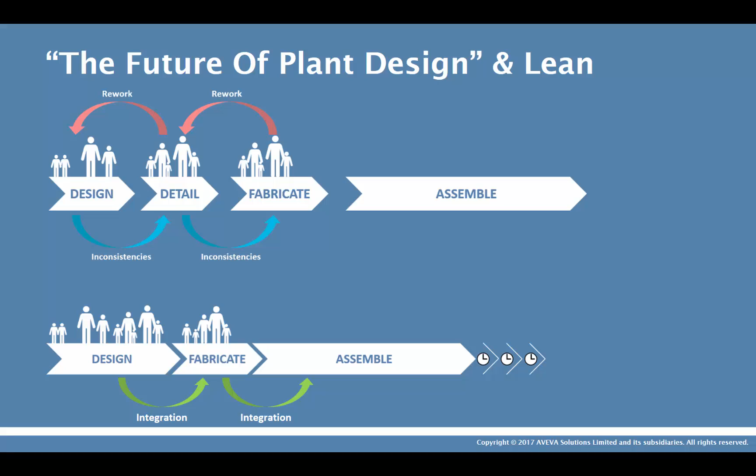I guess what I'm talking about is something slightly different. It's trying to make sure that you keep on track, you keep the information integrated all the way throughout your design process, right from the beginning all the way through to the end of fabrication. This is important in the marine industry because there's so many bits to deal with.

It wasn't always like this. Back in the bad old days of black and white photographs, we used to make everything bespoke. Every part was different, and it was a very time-consuming process to build a ship.

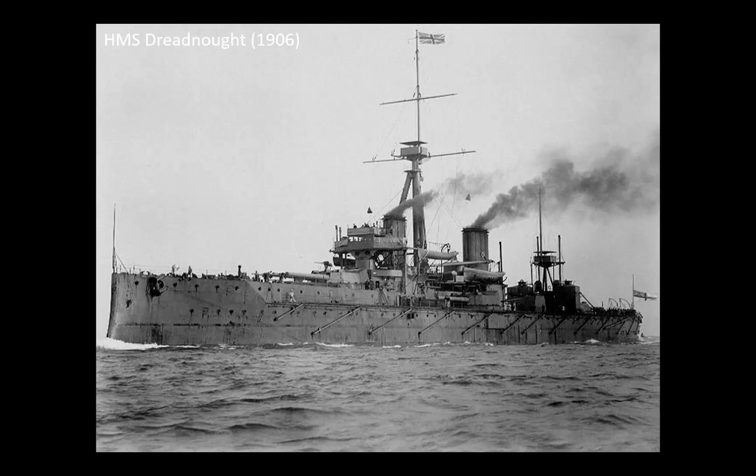But with the introduction, or the oncoming of the Industrial Revolution, the arms race that occurred before the First World War, we started to think about how we could build more technically advanced ships quicker.

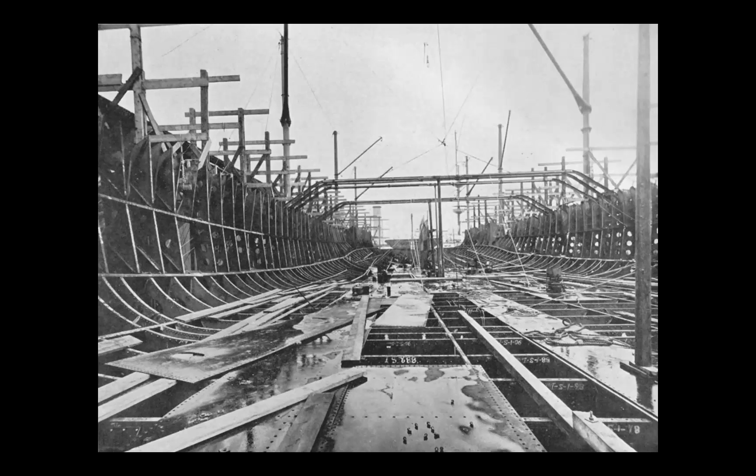HMS Dreadnought, built in 1906, was one of the first Royal Navy ships to really use this approach. This image was taken 2 days after the keel was laid, and you can see that a significant amount of construction has happened in that time. It was achieved through far more standardization than had ever been achieved before.

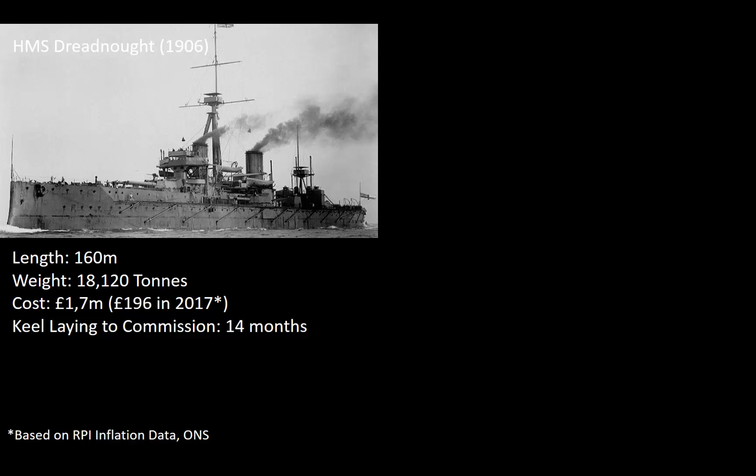This approach is even used today, and it's interesting to make some comparisons. Back in 1906, HMS Dreadnought was a ship 160 metres long, under 20,000 tonnes, and cost almost 200 million in today's prices. It took 14 months to complete.

Compare that with a modern Royal Navy ship: we have a smaller, lighter ship costing 5 times more and being delivered 6 times longer. Perhaps this isn't a fair comparison, because within reason this type of project isn't really taking advantage of the lean approach.

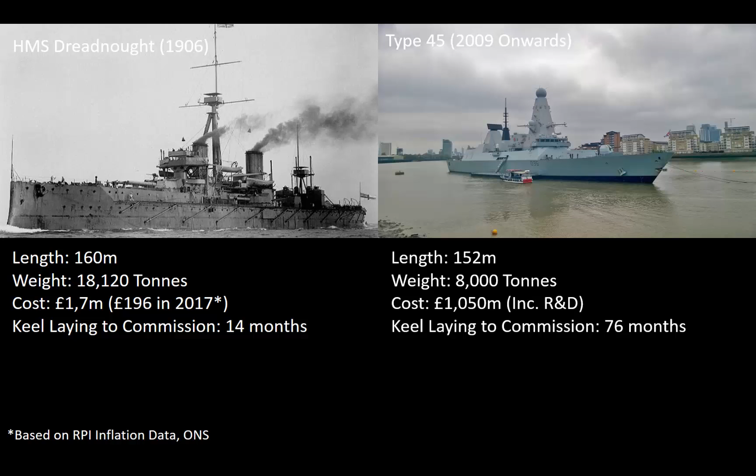But if we look at the commercial sector, we're having to really adopt this because of the competition in the market. With Queen Mary 2, we see a ship that's twice the length, 4 times the weight, costing only twice as much, and still being constructed in about the same amount of time.

To achieve this with such a large project, we'd have to have made some serious advances in our construction and design approach over the last few years. In fact, with a typical cruise liner, the fabrication at the bottom of the ship is normally being finished before the top has even been designed in detail.

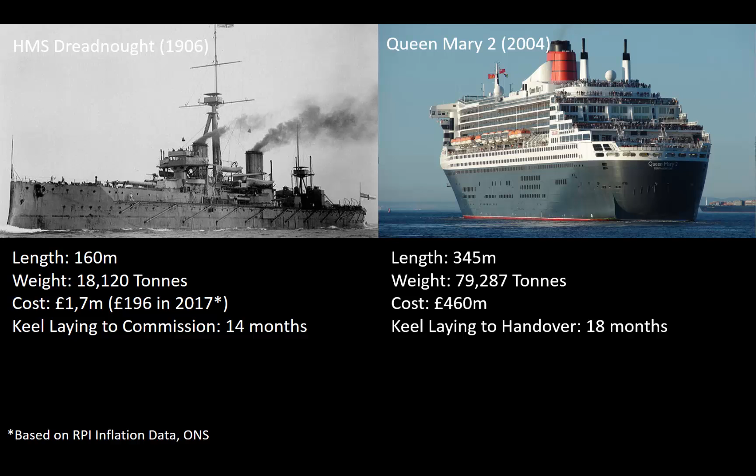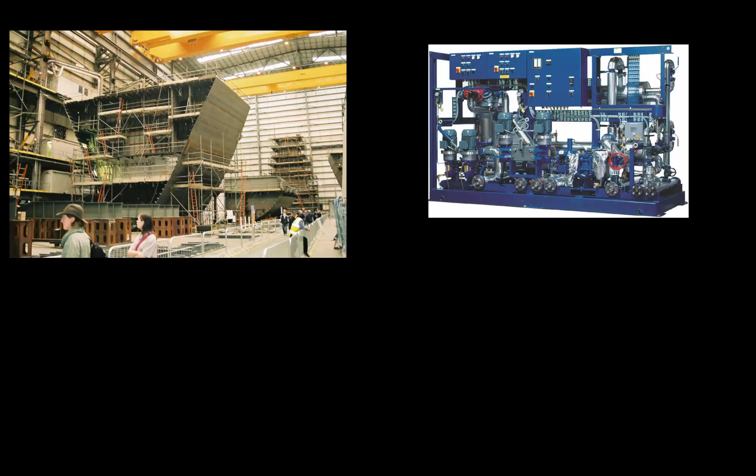So the methods that we've used to achieve this has been increased modularization. We bring those modules together, often in the northern hemisphere, inside covered yards where we can control the environment. We have a lot more dedicated facilities, cranes that are appropriate to the workplace that we're working in.

We may fabricate parts upside down. In this particular case, this unit has been turned upside down so that the shell plates can be put on. That optimizes the amount of downhand welding, because overhead welding above your head is a skilled welding process. It also takes longer to do.

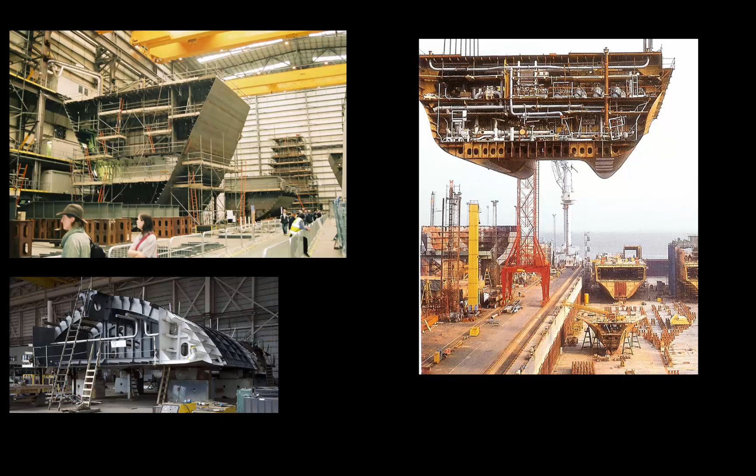So we can see that pre-outfitting during the earlier stages of the fabrication process has been an important characteristic of our change in the shipbuilding industry. It's made elements more modular, but it's also meant that we've had to plan the projects in far greater detail than just assembling them piece by piece.

This allows us in the modern world, perhaps in the last 10 years, to do a lot more multi-site working, constructing items in different locations with digital technology allowing us to do that, and allowing us to fabricate things that we can trust dimensionally and then bring them together at an assembly site.

This approach even goes as far as our luxury cabins on a cruise liner. It may feel like these have been constructed by fine artisans, but in fact those artisans may have been working in a factory a long way from the sea. The cabins would have been put on a lorry, trucked to the shipyard, and inserted into the ship like a cassette. It means that shipyards have been turning into far more about integration than about fabrication.

It's not only shipbuilding that has employed this approach. We see many industries that have gone down the modularization route. It is more efficient. You can control your working environment if you really exploit it, and the business benefits are there to be found.

If you can assemble things at the sub-assembly level because you're in a very controlled atmosphere, then it's often cheaper and you've got more space to work with. If everybody is trying to work on board a ship, it becomes difficult to get on board, time consuming. And if you're trying to bring large items on board, it can be difficult to navigate them and maneuver them around. So this has been one of the significant things.

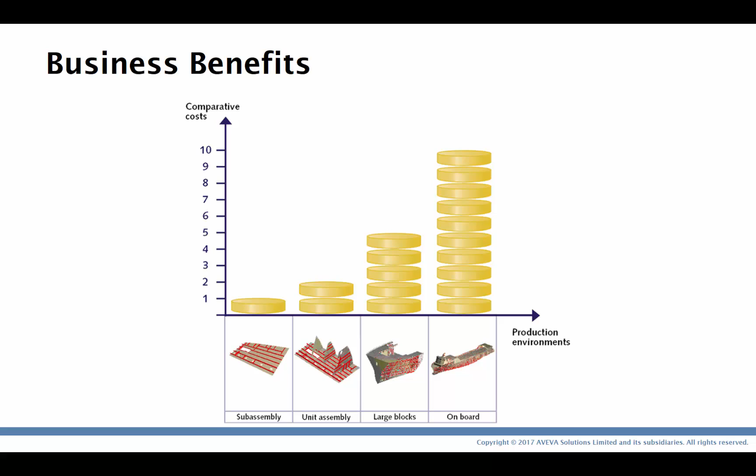There's many more once you start listing this. This is pretty much the whole of my second year at university thinking about design for production. There's so many different things that have contributed, adapted and evolved over the last 50 years in shipbuilding.

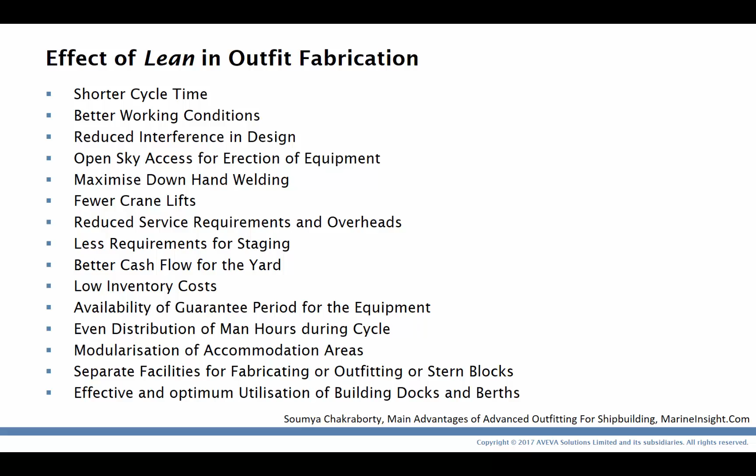So at this point, I'd like to introduce assembly planning, a tool that AVEVA has created over maybe the last 10 to 15 years for assisting shipyards in this process of bringing things together. It's worth thinking about how we do this.

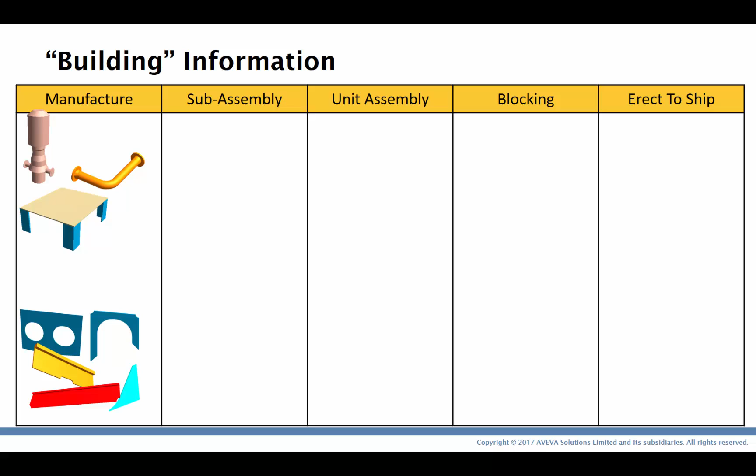When we're building a ship, we start with effectively a pile of bits. Individual items have to be cut and put together. So we may take some valves, some pumps, some basic structure and assemble them into a module. We'll take our parts, our sheets of steel, our bars on the panel line, and weld them together into our first sub-assemblies. And then we'll go on.

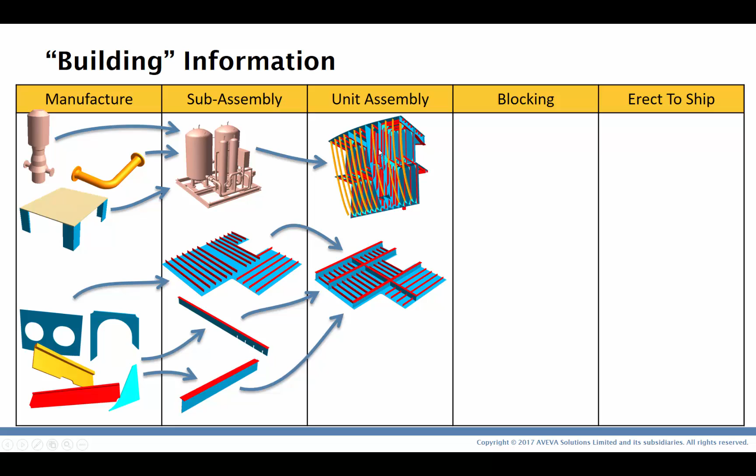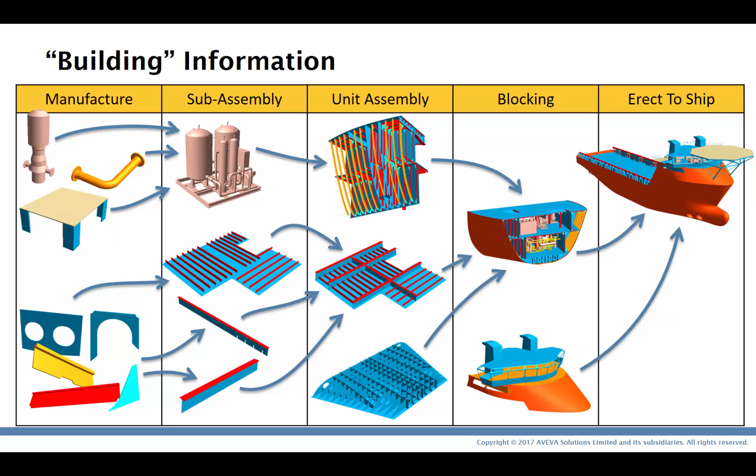We might take the modules and insert them into a unit. We'll build more complicated panels. Those panels will get turned into blocks, and ultimately they'll be erected at the ship, in the building dock. What we're building here is a tree of items that have to be linked together. These items exist as digital items in our design tools, ultimately representing the nodes of this tree. But equally as important are the edges. These represent the work, the resources, the instructions that you have to put this project together.

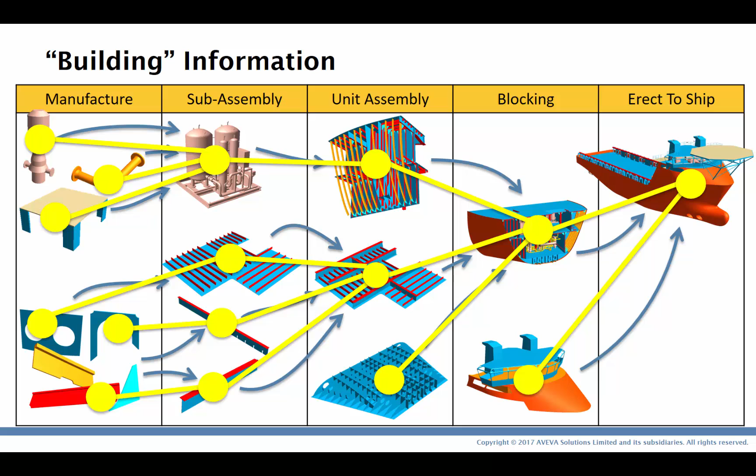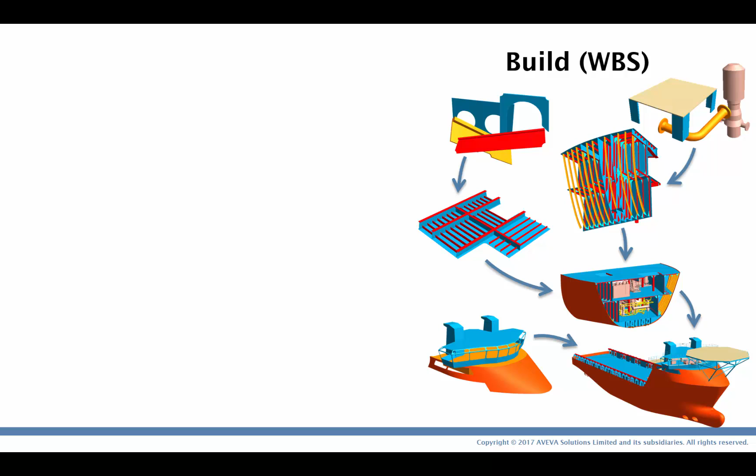Looking at this another way, this is our work breakdown structure, the tree. But in the design world, do we really work with this? Often we're working with a slightly abstracted way of looking at our data. It's what the software wants us to see.

We have to consider the way that information is stored, the way that it's distributed around our workforce, the way that we control it. It can be the case that we start out thinking that we'll build it one way, and halfway through the project we'll need to change that idea and build it another way. And it's difficult for our data model to necessarily adapt to that process. This is where assembly planning comes in. It allows us to link our design world to our building world.

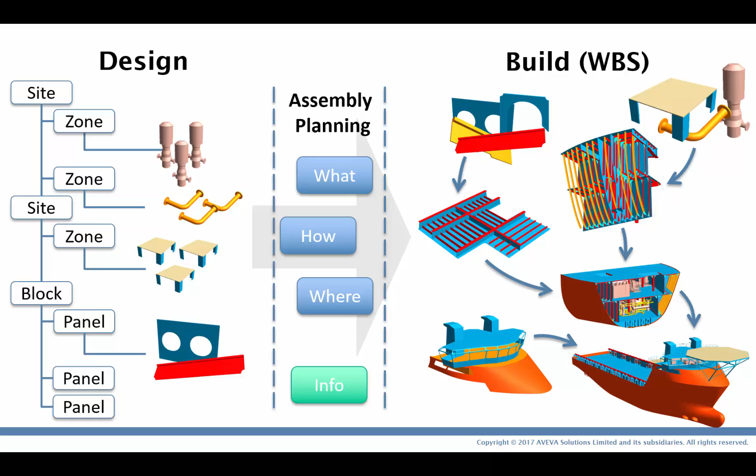We can take our design model and through the assembly of digital components we can determine what we're going to build, how we're going to build it, where we're going to build it, and the information that we need to do all that together. In fact, it's a very simple process.

As I highlighted in the previous slides, it's a tree. When I actually create the assembly plan, it's just a tree of items. I create a tree in software terms, and I link the items from my 3D database to it. It's this simple that even demonstrating it would perhaps degrade the power of the tool itself. In the design explorer, it also exists as a tree, so it's very simple to interact with.

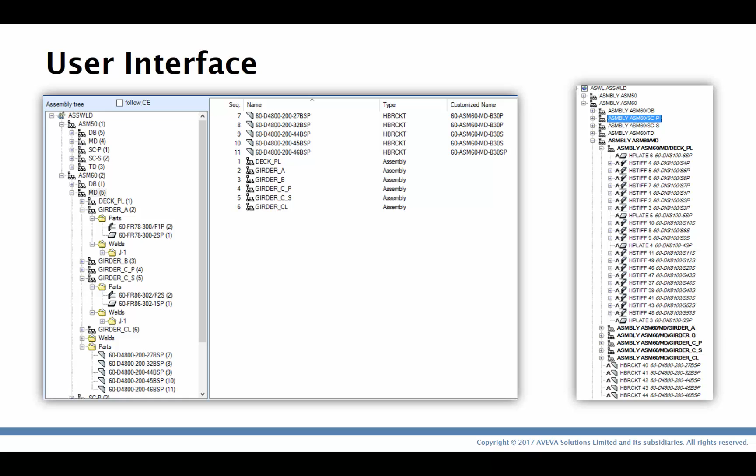It pretty much is nothing more than this, but it has potential power for managing our project. If we think about it, the designer is creating our parts and may, if he's experienced, assemble that into an assembly. Now that assembly has an identifier, and that identifier can be passed to production where they can evaluate that assembly, make changes of their own.

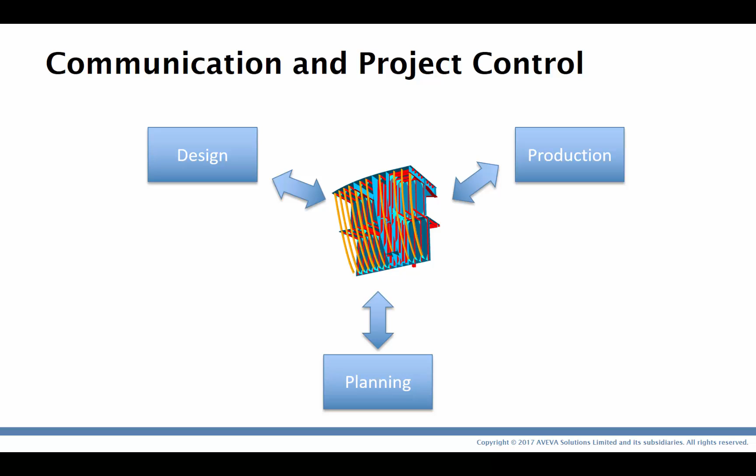That information can also be passed to planning, and they can review that assembly, understand where that fits in the grander scheme of things. So what we've created is a means to communicate between each of the departments within our business, a way of controlling the information. In fact, the assemblies start to become part of the language that we use to communicate where we are, how it's going, and what status we're at.

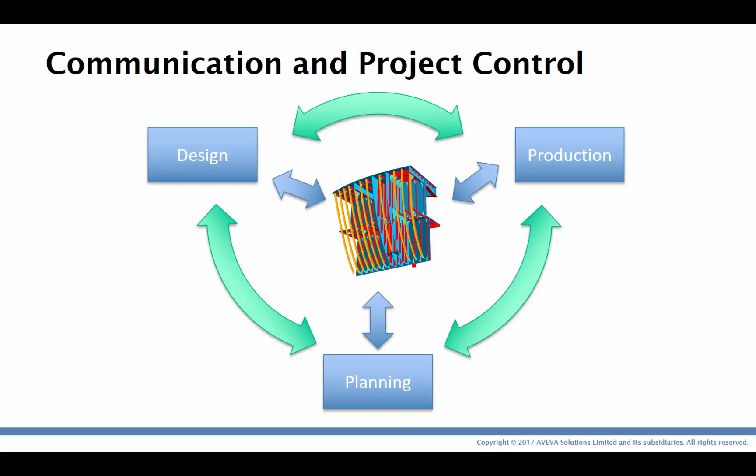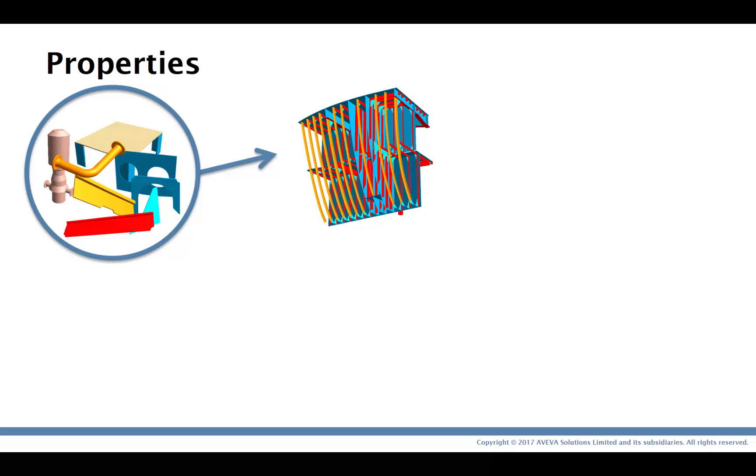Now let's have a look at an assembly itself. It is, of course, a selection of parts, or perhaps other assemblies. It brings them together into the assembled form. And once we've done that, the digital information that we have allows us to understand the weight, the size, and the logistics that are involved with bringing this together.

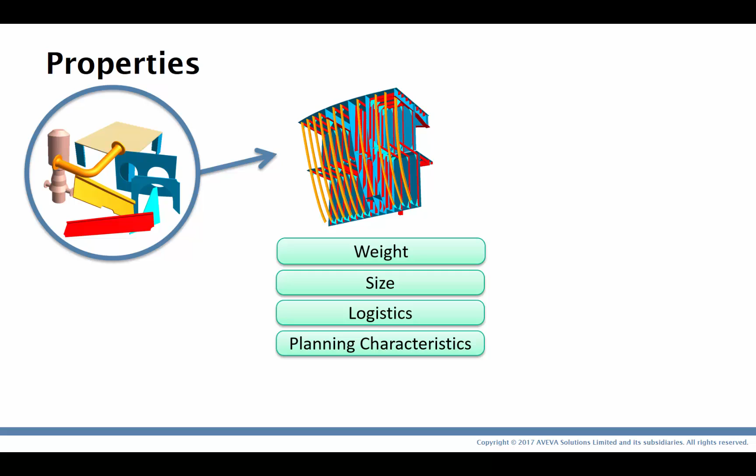From that, we can determine our planning characteristics. From a shipyard point of view, we can identify the workstation where it's going to be built and the orientation that it needs to be built in, because it might be upside down, it might have to be laid on its side if it's a strange shape.

Along with this, there's no reason why we couldn't use the power of the software to associate our documents with the assembly node, the drawings that represent the assembly, and the work instructions that we're going to use to put it together. So this is a very powerful concept, considering that as far as the data structure goes and the way you create it, it's just a simple tree data structure.

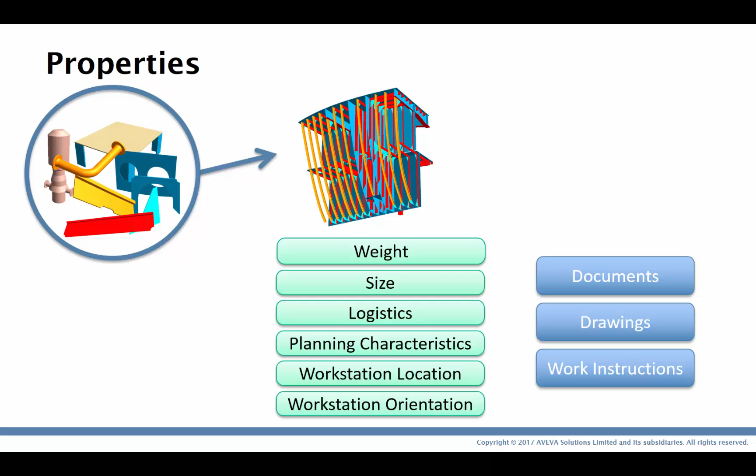The potential applications of this go beyond really what it was designed to do. It of course fulfills the idea of a construction sequence, although these days many people are thinking about construction sequences in terms of animations. Assembly planning does this as well, but the depth of information inside of assembly planning can be as much as we want to build.

Ultimately, we're trying to represent work in terms of the instructions to build something, or the packaging of how we're going to put all of this information together and give it to our labour force, or the planning, how we're going to actually put all this together beforehand before we get to packaging.

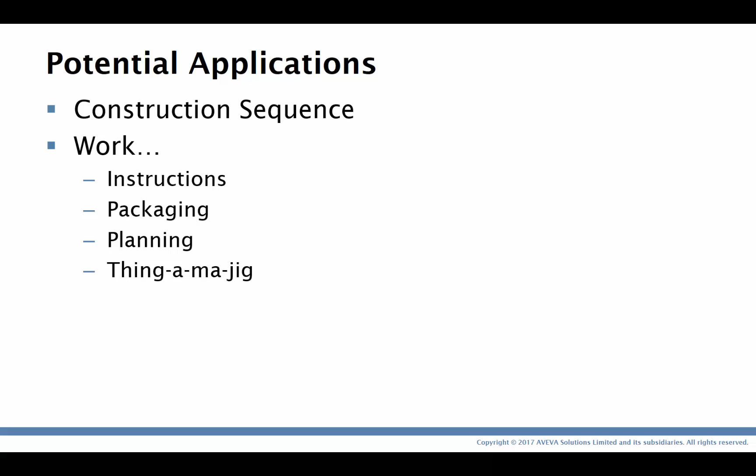So the ideas with this could be quite wild, could be beyond the typical production scenarios that we're normally dealing with. It's supporting the document associations. We could think about using standard assemblies so that every assembly is not bespoke. We can make standard parts for those assemblies.

It addresses the need for palletization. Assembly tells us what parts are going to go in the packaging with the work instructions and sent to a work location for fabrication.

So potentially the ideas of where I'm working towards is that though this is the way that this system is set up, there are more ideas that you can use it for, and certainly in shipbuilding and perhaps in other industries there are other ideas that this could be applied to, and I'll come on to them a little bit later on. So assembly planning is set up for this kind of idea of setting things together. Let's go into a little bit more detail as far as how these can be applied, some particular ideas.

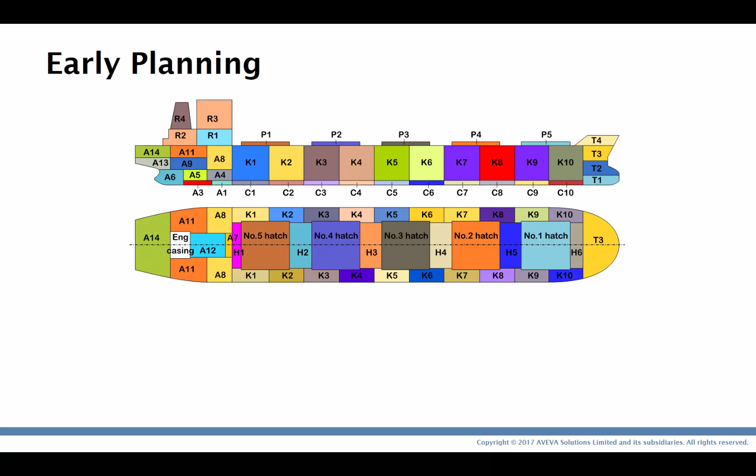This is a diagram of a ship. You can see that it consists of basically rectangles and shapes that have an identifier. This could be something that you produce in the early phases of your design process. Your design process will be working with a plan of how this gets fabricated. And obviously we're at an early stage here. Perhaps we haven't even created a 3D model.

So at this stage there's nothing stopping us from creating an assembly tree that represents the plan of how this will be put together before we've even considered making a 3D model. The thing is, once we start this, we have something that we can talk around, something to communicate. It establishes information that our designers can use and associate with.

They can contribute to the assembly planning tree with the 3D model, which then goes on to the construction process. They can utilize the assembly planning tree. So what it means is, for your project, it's a bit like a stick of rock which says assembly planning all the way through. We can carry this piece of consistent information all the way through our project process.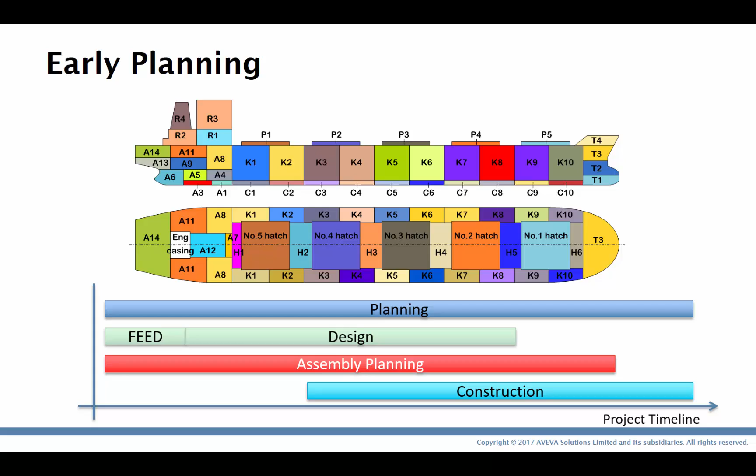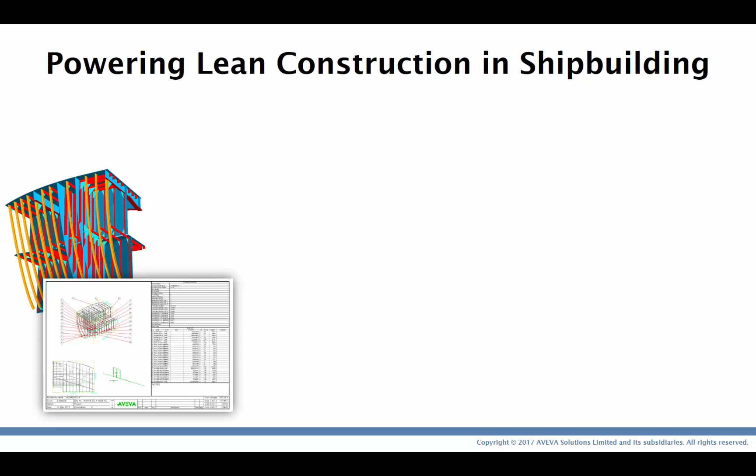Now looking at the end of the process towards construction, which is where we start to use the maximum extent of the information within assembly planning. The assembly within the application itself can create drawings using automatic drawing production, the sketches. We can use the interactive reporting tool to create a report. This is pretty much the extent of the software application called assembly planning.

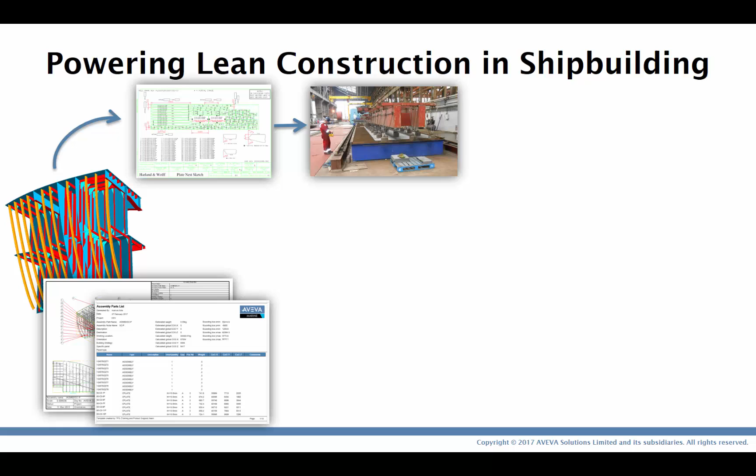But now we can utilize the information within it, which takes us outside of assembly planning. It tells us what parts we have to nest to allow us to do the plate cutting. Similarly, with the bar cutting, we get the same information. Now, I spoke earlier about the identifier. The assembly has a name. Individual parts within that can be named based on the assembly. We have a kind of naming scheme.

With modern cutting systems, they also have the ability to mark. So we could put those names actually on the parts, so that when that part is produced and picked up, we know exactly what it is because it has the assembly name and the part name. Gather those parts together, they can be put on a pallet, which represents the assembly with the documentation from the assembly.

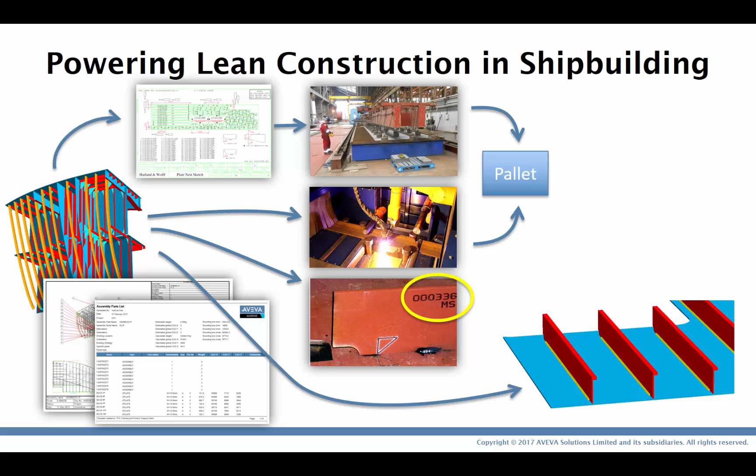Extending it further in some more lean-invested shipyards, assembly planning has another module called weld planning, which identifies the junctions between parts, the things that you need to bring together to make it. These are identified as database information, geometric traces, which can be used to power your robot welding.

So in this picture, we have a very lean process, perhaps the process that somebody like Hyundai uses. But not every customer will go to this extent. It depends on whether they can utilize standardization to the fullest extent. But they can still pick and choose from different aspects of this to make the best way within their style of projects and their style of facilities.

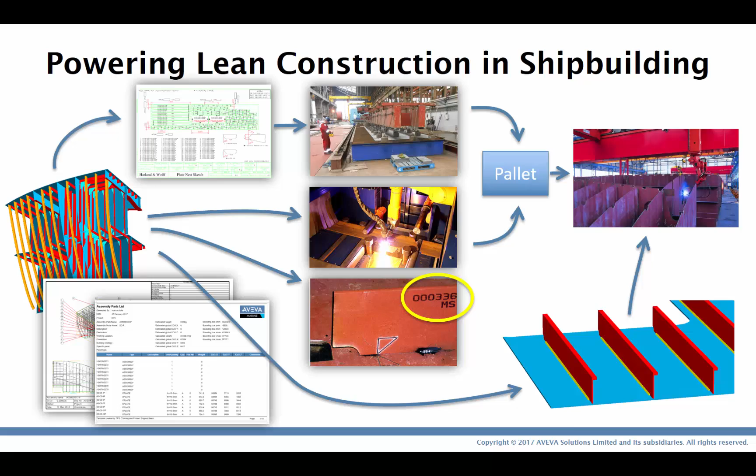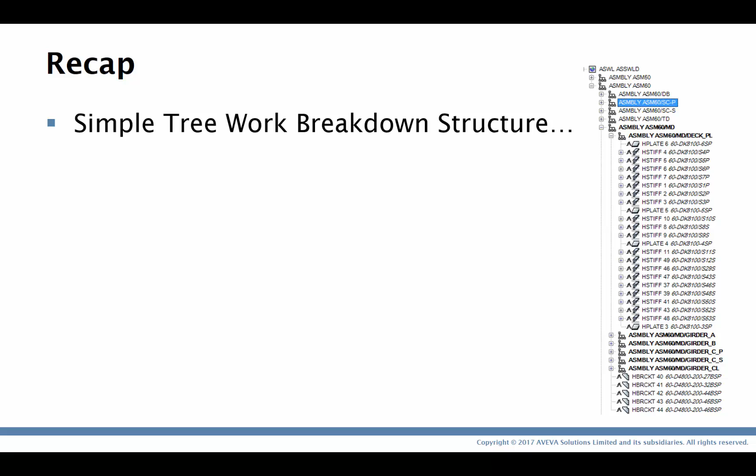So we got a bit detailed at that point. It's worth stripping it back and recapping what we've got. We're dealing with a simple tree work breakdown structure. It's just a tree. That tree references the 3D elements in our project and supports associations to documents that tell us how to build the assembly, and may incorporate attributes which are important to the assembly itself.

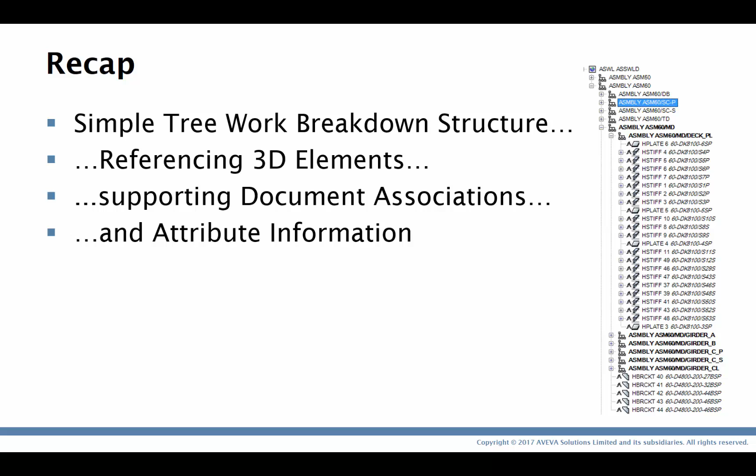So ultimately what we have, compared to other solutions, is a simple solution to a problem rather than some massive investment that might change your business. And because of that, it can be very easily integrated in your project and very agile in the way that you use it. And because it's a very simple process that gives you the ability to discuss and communicate, it can powerfully initiate other processes.

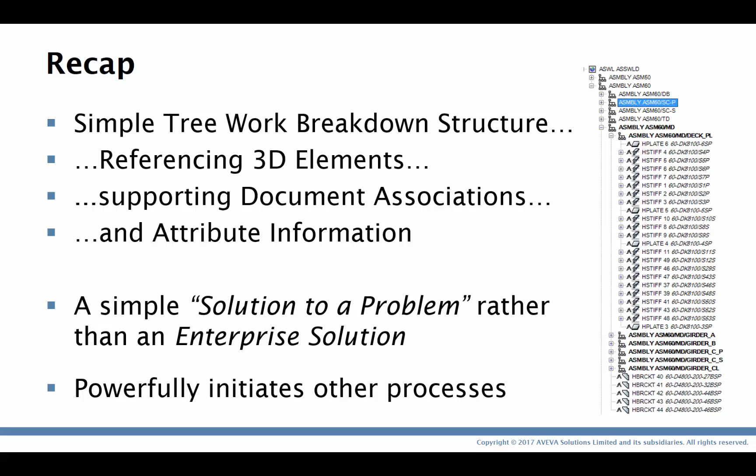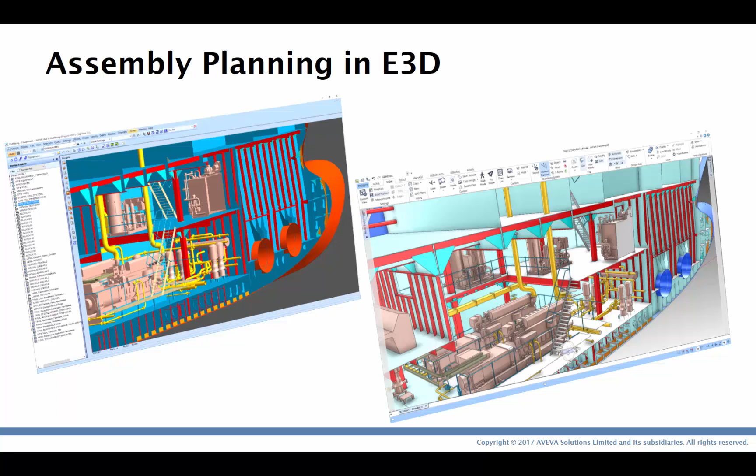Today, assembly planning is not yet available in E3D. With the integration of the marine functionality into E3D over the years, it will come. And because E3D is very much an agnostic tool, it will give other domains of engineering the opportunity to use this in their projects. That's something customers are interested in. But we also find areas where they're already using this kind of approach, but they're not necessarily calling it assembly planning, or doing what assembly planning was designed to do. I'd like to talk about some of those scenarios.

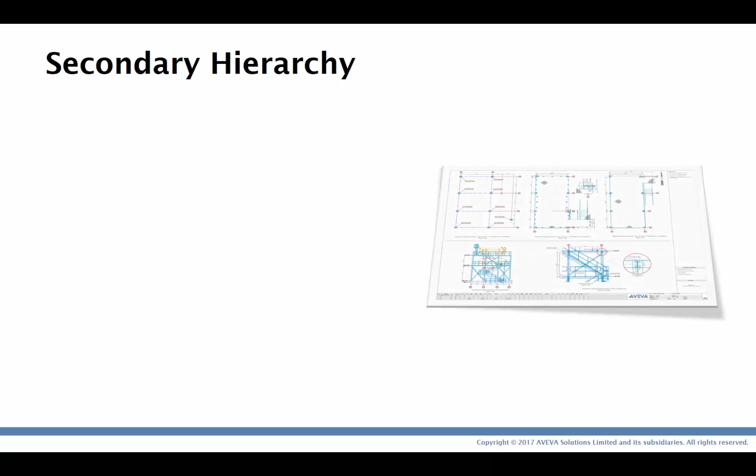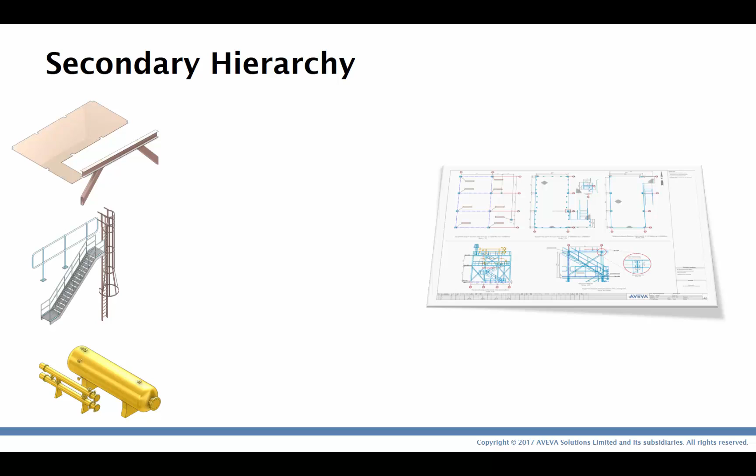One of them, my colleagues have informed me, is called the secondary hierarchy. A similar idea with a work breakdown structure which connects, in this case, the drafting world with the design world. The designers are creating the 3D parts. They may be all over the project. The drafter might not necessarily know the context or the position of these parts. Together they can work on an assembly.

In this case, it's a group set, where they assemble the information and give the 3D information some context as far as drawings are concerned. In fact, we're building draw lists here. And those draw lists can then directly be used on a drawing without too much need for the drawing person to go into the 3D model and collect parts.

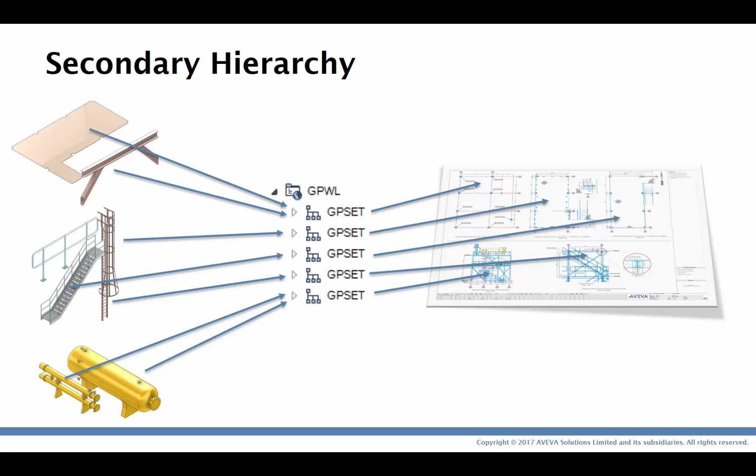Another opportunity is through engineering. In fact, there's so many opportunities with engineering. Two particular examples, one a shipbuilding case, one a non-shipbuilding. There's a shipbuilder that wanted to create exactly the tree that we get with assembly planning, collecting work instructions, but the challenge is that they wanted to create a very detailed tree of instructions, not necessarily consisting of parts. And because assembly planning is very much focused around the 3D side, they couldn't do it in assembly planning.

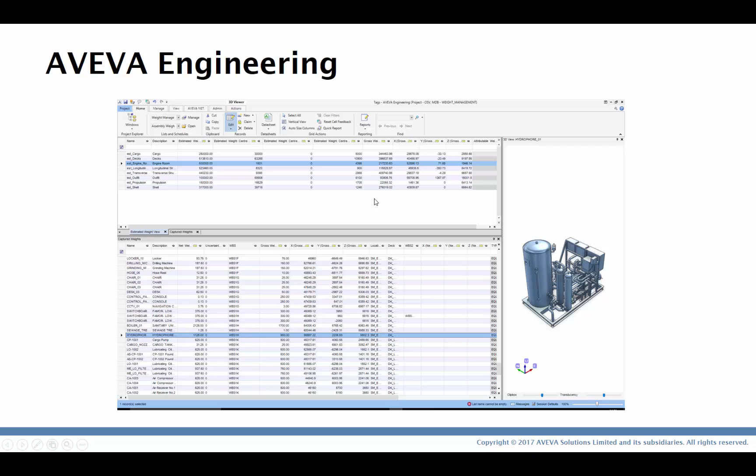So they built their own tree in AVEVA Engineering and collected information that could be displayed in the 3D world, but in the tables gave them a lot of functionality which the standard assembly planning application doesn't have. Another non-shipbuilding situation is a plant customer in the US that was using AVEVA Engineering in a tree-type structure to make work packaging, I think work-face planning they called it. Being able to collect 3D models and the drawing instructions, work instructions, other information they needed together so that they could run their maintenance systems on a day-to-day basis.

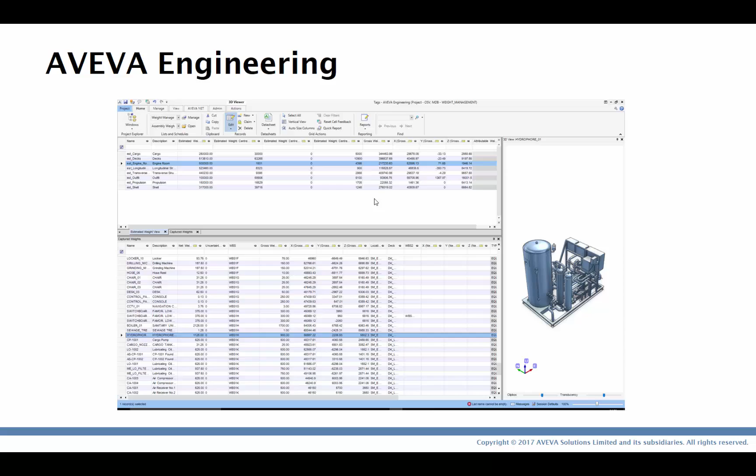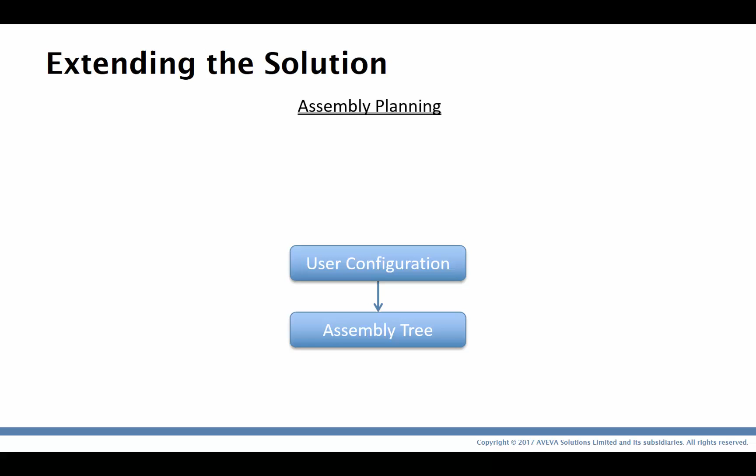So you can see that the ideas for trees and connecting people between different worlds is very powerful in this approach. And that's when I said at the start, assembly planning might not necessarily be about work or planning, it's really down to the kind of innovations that we make. And often those innovations require customization. So it's all about extending the solution, and our software allows you to be able to extend it without any interaction with us often. So from an assembly point of view, assembly planning, if you wanted to extend the assembly tree to capture other information and do things that we didn't think of, you could of course user configure it to do that. Similarly, with the secondary hierarchy idea, you could take a group tree and configure it in the same way.

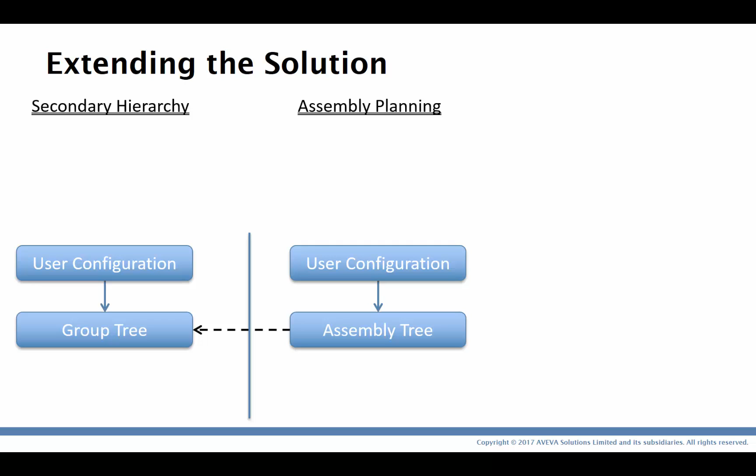In actual fact, there's a significant relationship between these two areas. If you look at the way that the assemblies are stored, their attributes, you'll see that pretty much they share everything that the group has. The only difference is that there are some additional rules with assemblies that make them behave differently to a group. You can only include a part once in its assembly tree. And then you have the AVEVA Engineering solution, allowing you to build a tree of engineering items through user configuration. So you have three similar solutions that you could expose the information in your project. You could do all three, you could do just one. There's a lot of commonality behind that.

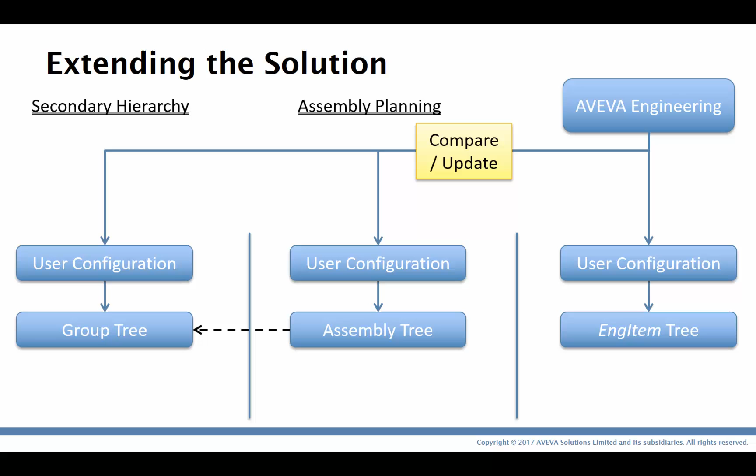And while that may help you achieve some leanness in your project, as far as we look at it with managing our software, this causes some complexity. Perhaps we're not looking at this in such a lean way as we could be. So there's some opportunity for some consolidation in this. But we don't get that without talking to our customers. So this is where, and we'll come to the opportunity at the end of the presentation to ask this, is whether this sparks some ideas in your head as we've been going through this. Whether that gives you some fabrication ideas, or planning ideas, or ideas about something that I've not even covered that is important to you, that you can see can be solved this way, but I'm not necessarily thinking about.

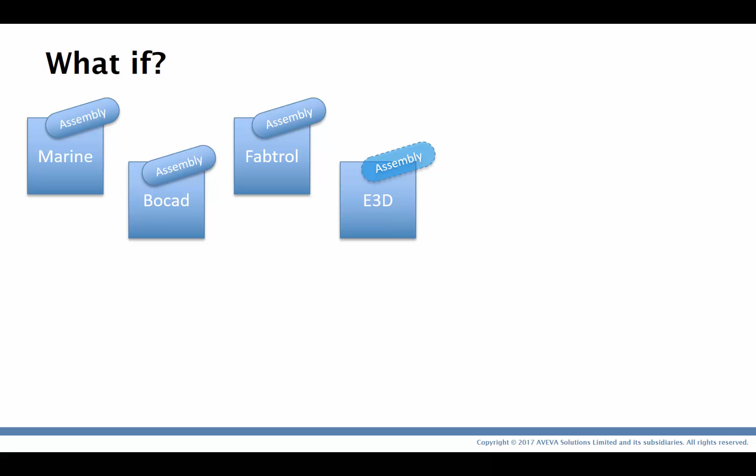We'll take this one step further and look at other ways that we can innovate our products. Perhaps this is an opportunity. Once we start to look at our products that are actually involved in fabrication, we see a lot of commonalities between them. Marine has assembly planning. If we go to the BOCAD product, we also see that it has an assembly concept. Looking through the documentation of FabTrol, it also references the idea of assemblies. In the future, E3D will also get the assembly planning concept as we might move forward. With AVEVA ERM, they also have the same concept, but being Danish, they called it kitting. AVEVA Engineering can also be used in this way, but you have to build the entire solution yourself. And of course, outside of our products, our customers are using third-party tools like Primavera, where they can also build trees and do slightly other capability.

Now, referencing the fact that what we're creating here is a really simple tree structure, wouldn't it be nice if we could have an idea of that common assembly model, like the words running through the stick of rock, through all of the different applications, some kind of interfacing. This is something that is my personal idea of how this could be done. It's something that could be explored more between you, the customers, and our internal team.

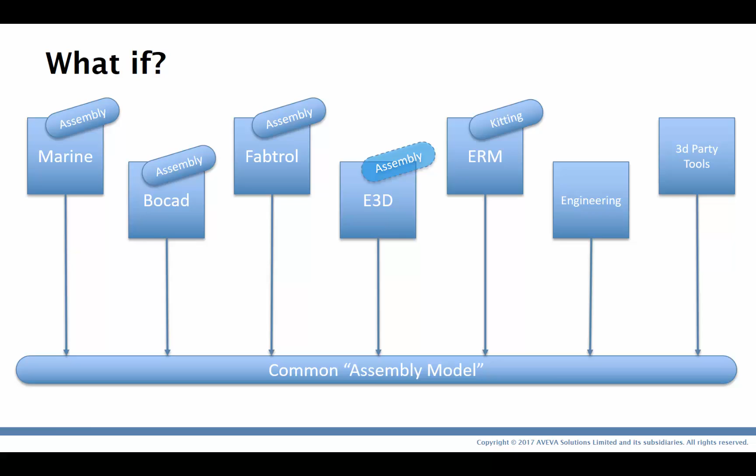So closing out the presentation, we've seen and discussed how the lean concepts have greatly enhanced shipbuilding over the last 50 to 100 years. It's been achieved through innovating a simple idea. There's been powerful changes to the fabrication process, and AVEVA has been able to contribute by allowing them to connect the design world to the 3D world using assembly planning. But now, as we'll give you in the future the opportunity to use such a tool in E3D, I'd be interested to see what you think of this concept.